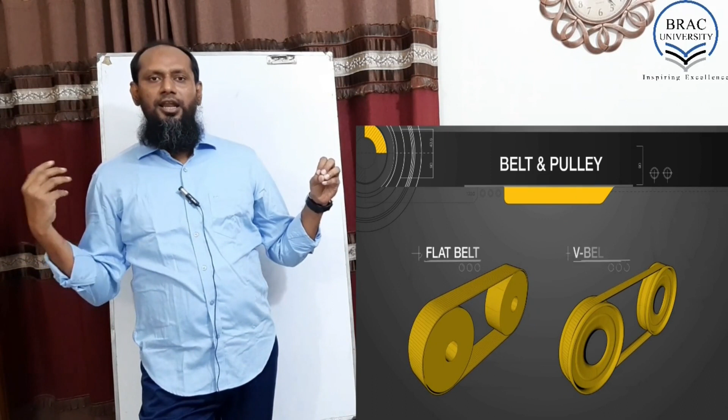This is another important issue, like transmission. Transmission means power will be in one place, but action will be in some different place. Like when we ride our bicycle, we pedal in the middle, but the wheel is spinning at the back. So we are using a chain for transmitting the power to the back. Okay? So chain, timing belt, these are the things that can be used for transmitting the power. Okay?

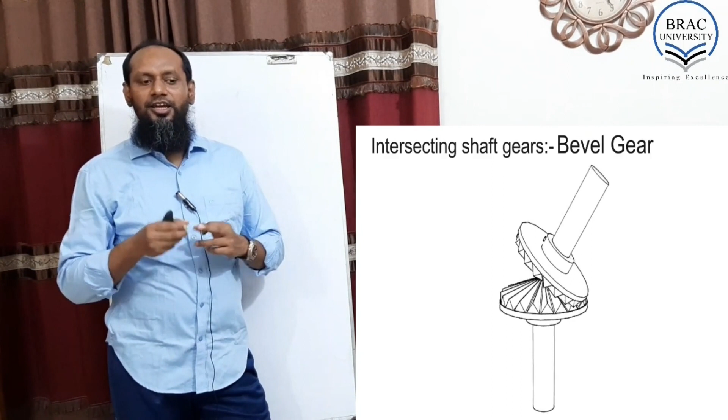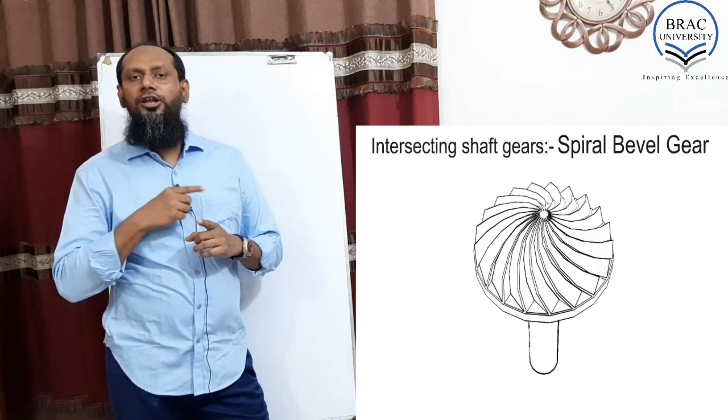This is another thing for transmission: the gear system. Gear is very, very important for robotics guys. Whoever works with robotics needs to understand gears. Number 1, gear can reduce the speed. Number 2, gear can change the direction, like from this direction to that direction. Number 3, it can increase the speed. Number 4, it can even change the form, like rotational form to linear form or linear form to rotational form. So gear is very, very important for robotics.

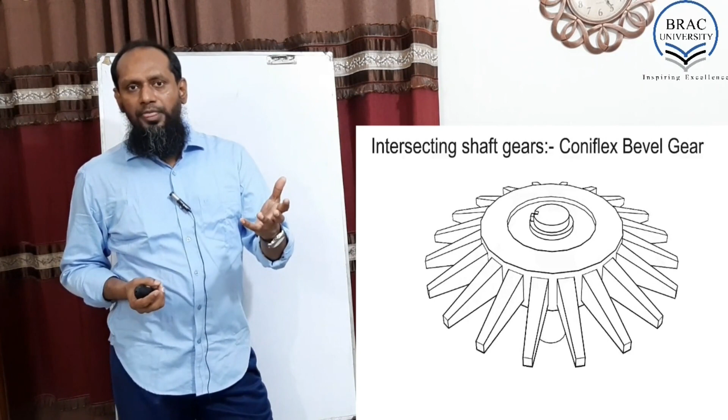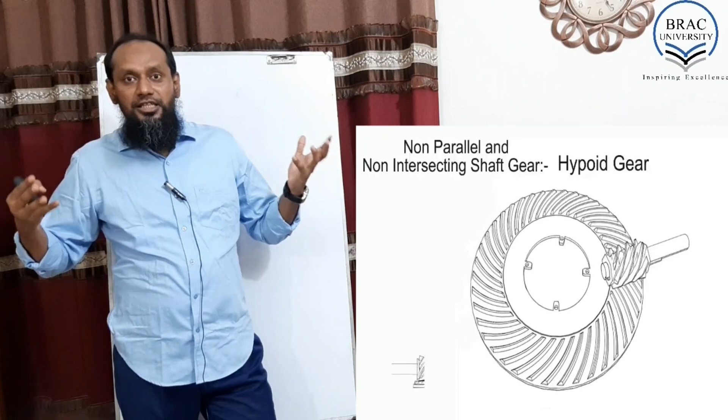Okay. For your information, when we use gears, the speed and the power are inversely proportional. Like if we use a spur gear, if it reduces the speed, then it will increase the power. Even the worm gear, in our car window or the wiper motor, they really use worm gears. It decreases the speed 1:80. That means it decreases the speed 80 times, but surprisingly it increases the power 80 times, minus a few mechanical losses. Even the mechanical loss can be reduced by using lubricant. So gear is another very, very important issue of robotics.

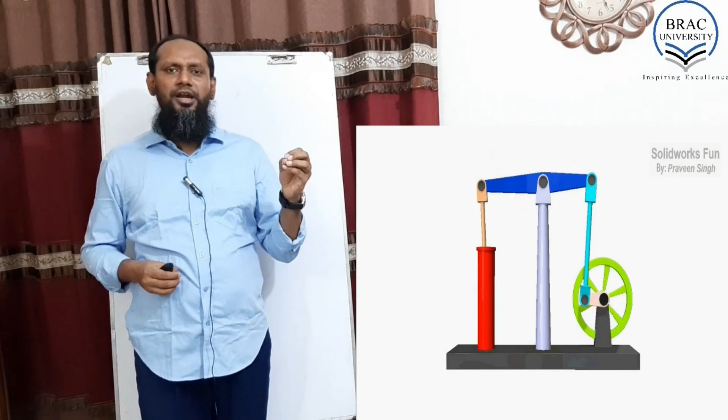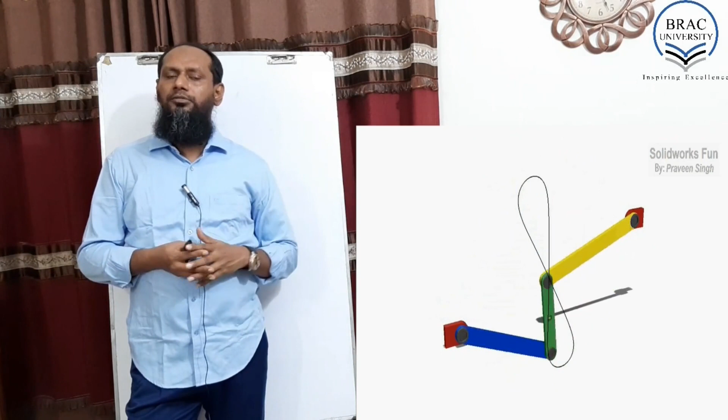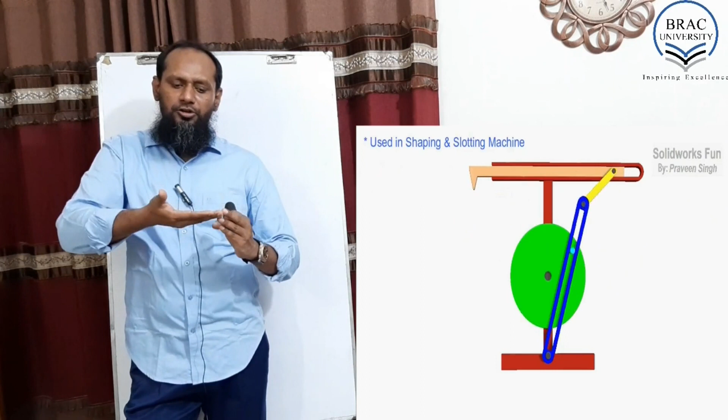This is a link mechanism. Link mechanism means by using one power, it's linking with a number of things. So by using one movement, it's doing 2-3 jobs. Keep in your mind how we can do it. Like in our first significant robot, Chandrabot, we were putting up the basket, and when it was putting up, it was also going forward. So by using just one motor action, one power, it's going up and it's also going forward. That kind of thing is called a link mechanism.

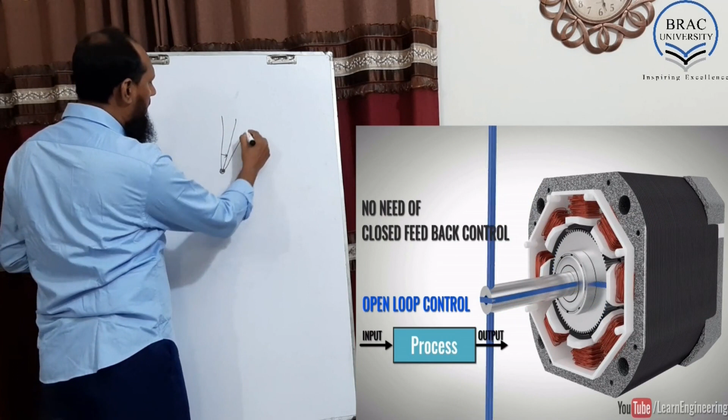Now we would like to discuss a few basic motors. In robotics, embedded systems, digital systems or hardware systems, we mainly use 3 kinds of motors: DC motor, servo motor, and stepper motor. Let us discuss the stepper motor. Stepper motor means step-by-step motor. If you give power, it will take one step. Power up again, second step. Again, power up, third step.

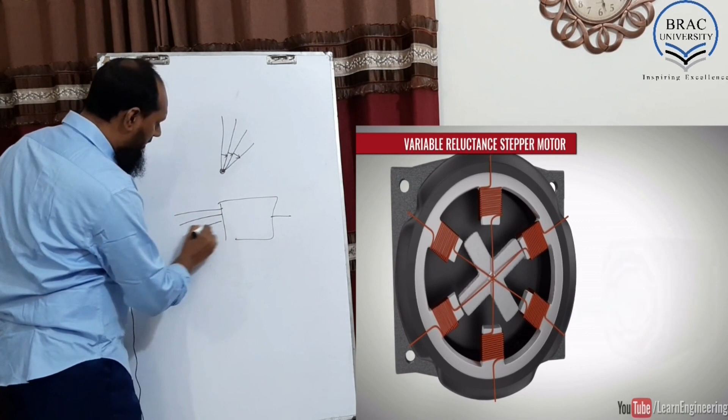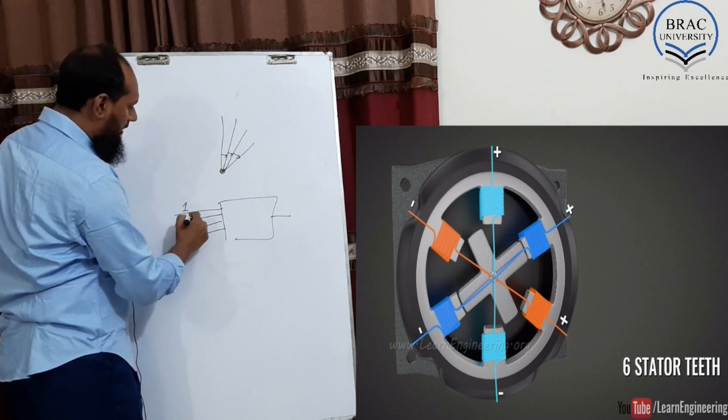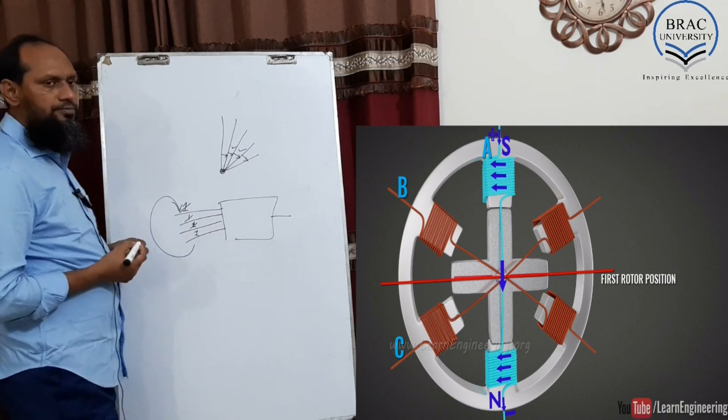So actually, the motor has 4 connections. When you give power on this connection, it will take this movement. If you give this connection here, it will take this movement. If you give connection here, it will take this movement. If you give connection here, it will take this movement. And then again come here. This is called a stepper motor.

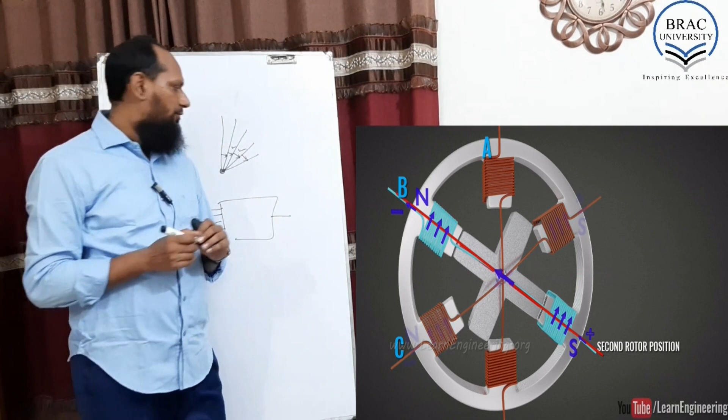The advantage is the rotation you want, the degree you want, can be pre-programmed. If you want a 90-degree rotation, you can see here, we need 5 steps. For 180-degree rotation, we need 10 steps. 360, 20 steps. If you want 5 rotations, 100 steps. So it can be pre-programmed. Some days back, most printers, even floppy disk drives and some CD-ROMs, were built using this kind of stepper motor.

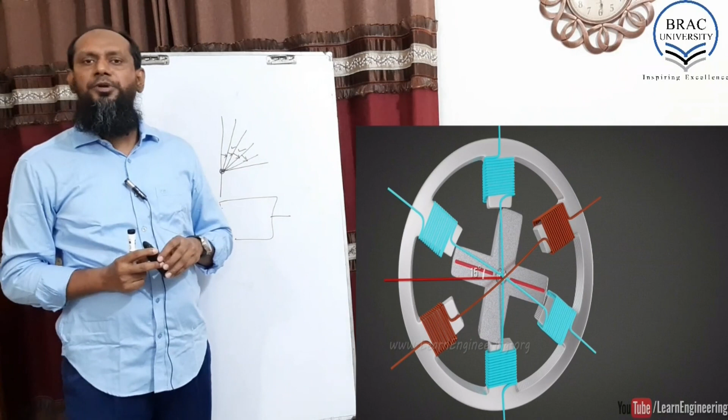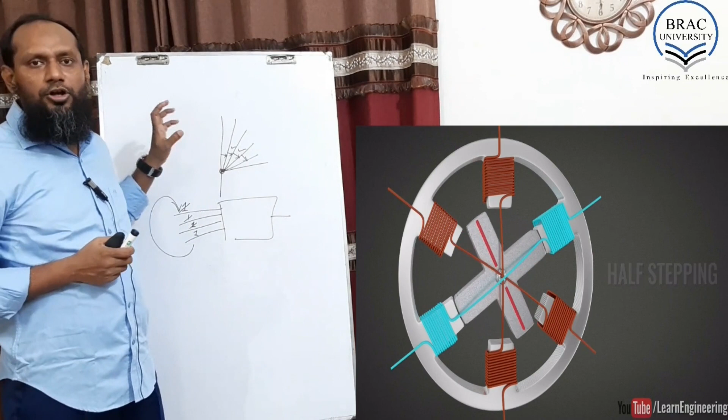But the problem is the stepper motor becomes heavy, because we have to use 4 coils for usually 4 steps. So 4 coils means the structure becomes complex, expensive, heavy weight, and difficult to program. These are the problems with the stepper motor, mainly expensive and heavy weight.

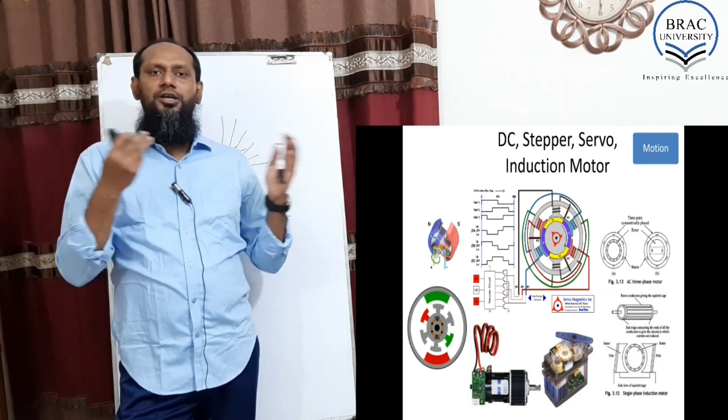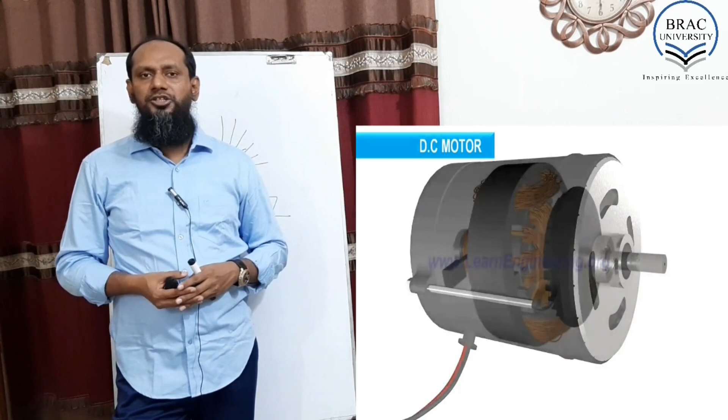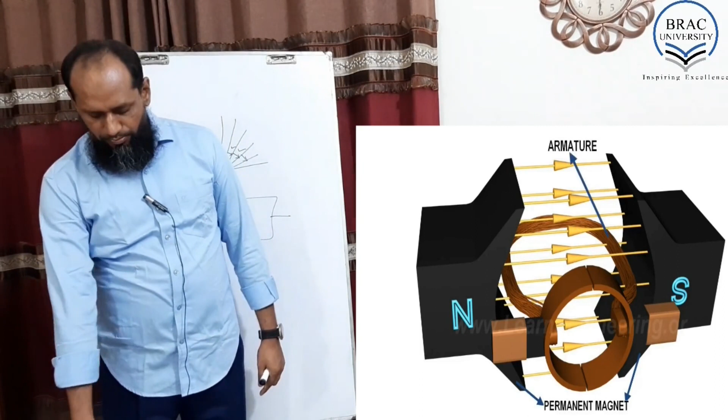So now in robotics we move from stepper motor to DC motor. DC motor is very simple, very cheap. For 50 taka you can get a DC motor in the Bangladeshi market. And the technology is very simple. There are 2 fixed magnets, North Pole and South Pole, and you have a coil. And there are 2 brushes at the foot. When this leg is on the positive brush and this leg is on the negative brush, the coil is built in such a way that the right side becomes North Pole and the left side becomes South Pole.

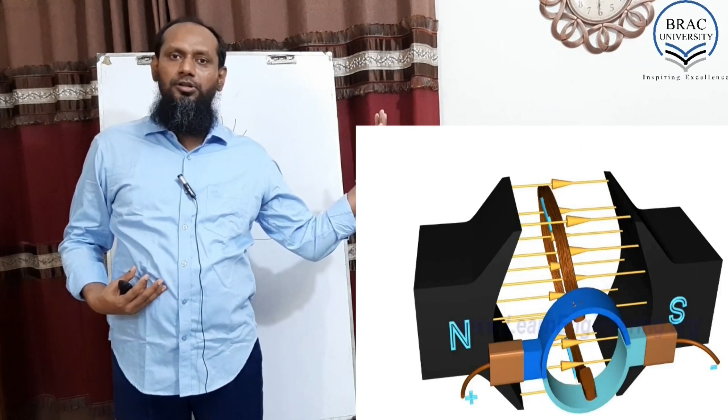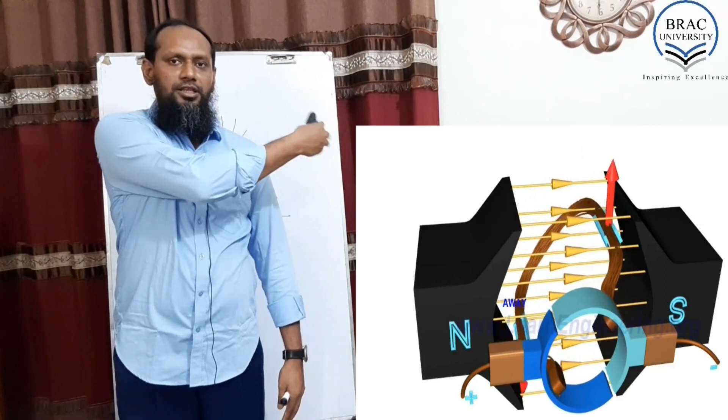But as I told you, the fixed magnet on the right side is North Pole and the fixed magnet on the left side is South Pole. So that one is North Pole and my body also becomes North. And in the same way, on this side there is a fixed magnet with South Pole and my body is also South. What is going to happen? They are going to push me.

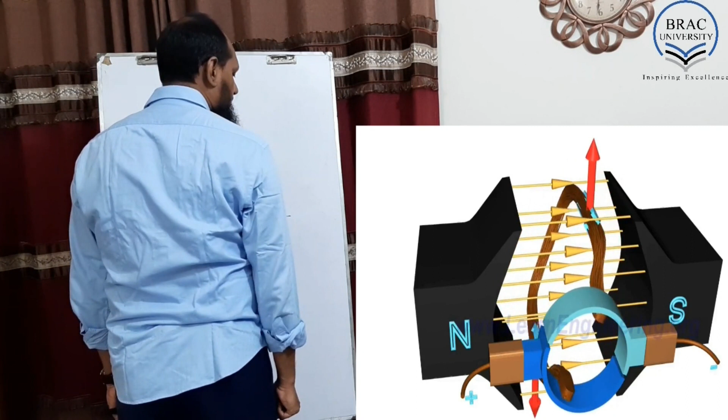Okay, so I will spin and you see my legs will change the brushes. So now my right leg is on the left minus brush and left leg is on the plus brush. So when my configuration is like this, then again this body will become North and this body will become South. Again I'll take a spin. That is the way, a very simple technique. So that's why this becomes so cheap, easy to control, easy to drive. That's why DC motors became very cheap and very popular.

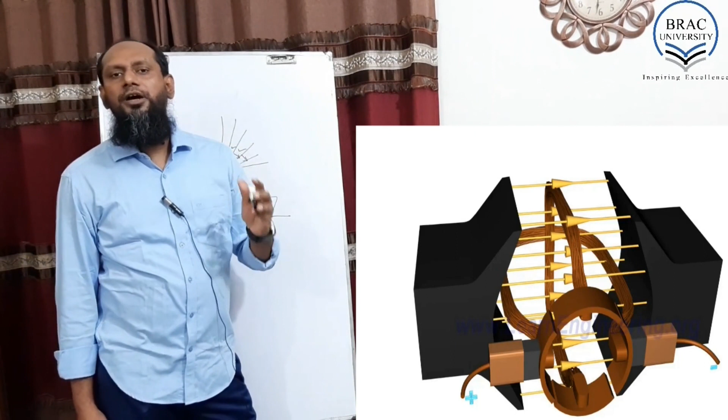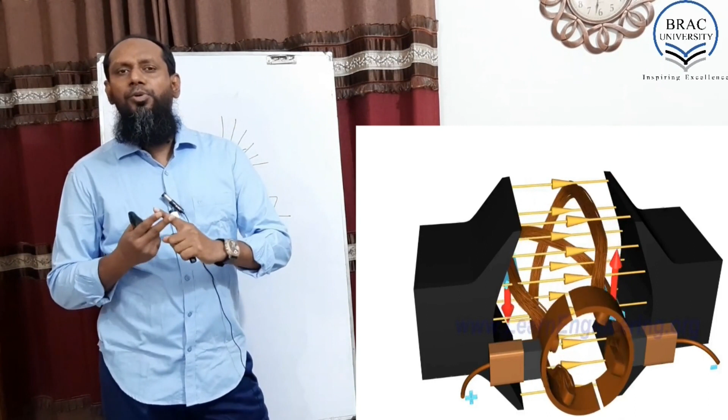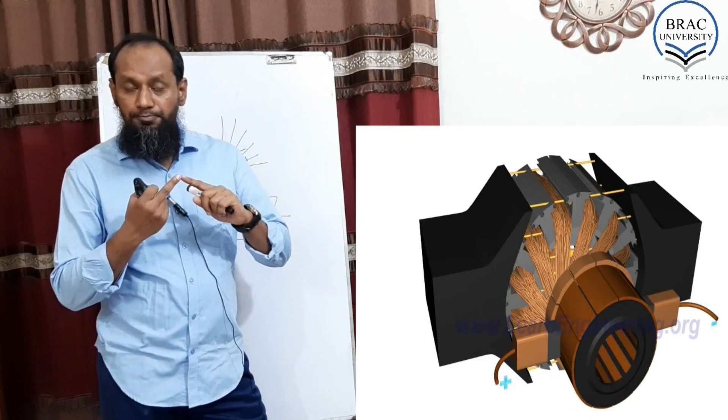In robotics we use DC motors for a number of purposes, but there are very important issues involved in DC motors. Number 1 is speed. The speed is too high, it cannot be controlled very easily. Sometimes we need to reduce the speed, sometimes we need to enhance the speed, like for a quadcopter we need to enhance the speed. And the second thing is the controlling. Like we want to take 3 spins. In a DC motor you cannot do it. With the load, maybe with the same power, it will take 5 spins, but without load it will take 7 spins. So to overcome this, we are using a gearbox, and the third thing is the power.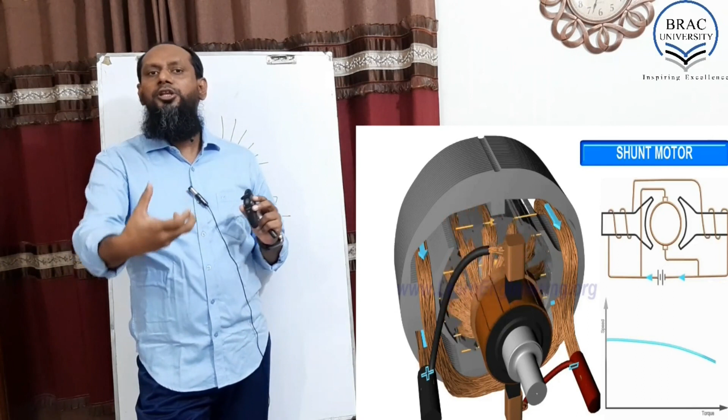Usually the DC motor is a very, very low power motor. You can stop it by using your fingers. So number 1 is speed, number 2 is power, and number 3 is controllability. These 3 things can be handled. Number 1 by using a gearbox. If we use a gearbox to reduce the speed, the power is enhanced, or if we use the opposite gearbox, the speed will be enhanced but the power will become low. So one is gearbox and another one is feedback.

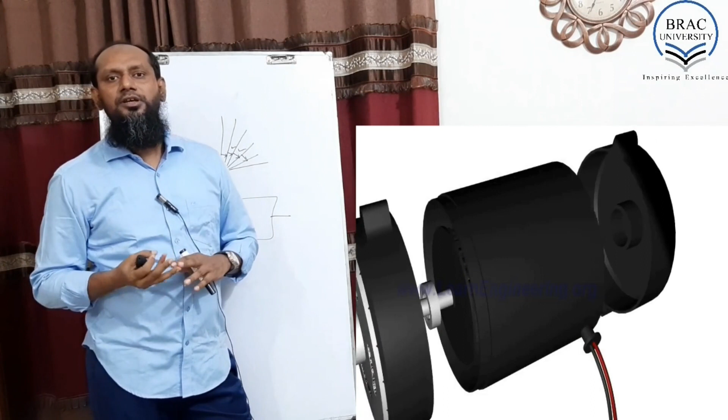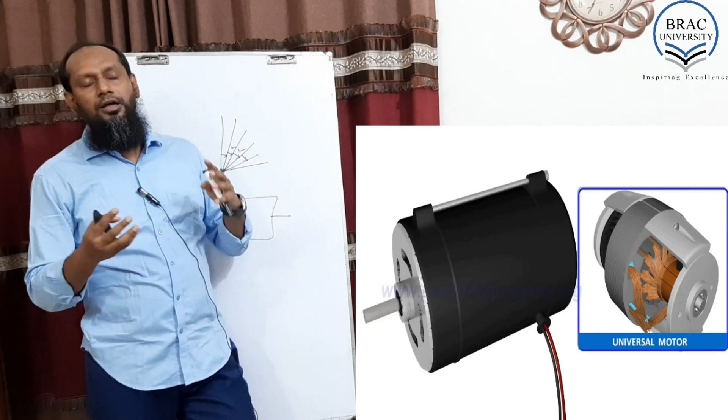We can use some feedback system with the motor shaft so that we can read how many spins it has taken. So if we can sense the rotation or every movement from each point, the DC motor can be used as a stepper motor. So yes, we are using a feedback system with a DC motor for getting input from the motor, how many rotations it has taken or how many degrees it has rotated. So number one is gearbox, number two is feedback system. By using these two things, a stepper motor can be replaced.

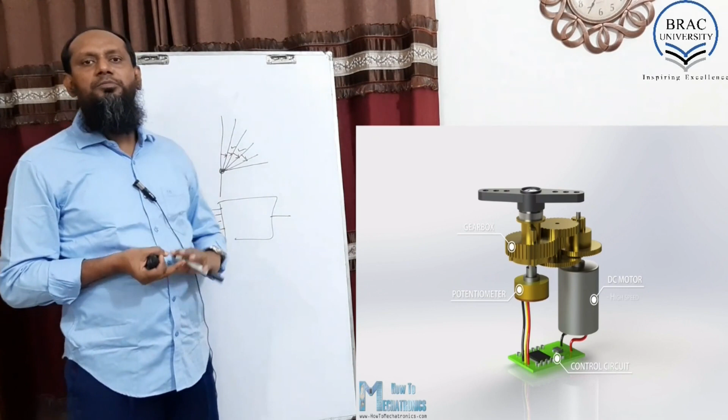In a servo motor, these two things are actually embedded. If you look inside the servo motor, you will see there is a gearbox, and if you dismantle it, you will see there is a potentiometer. It's taking the feedback, like how many spins it has taken. By taking that input, it has a control system inside the motor. It's giving you the degree. I didn't explain about the servo motor. A servo motor is a closed loop motor.

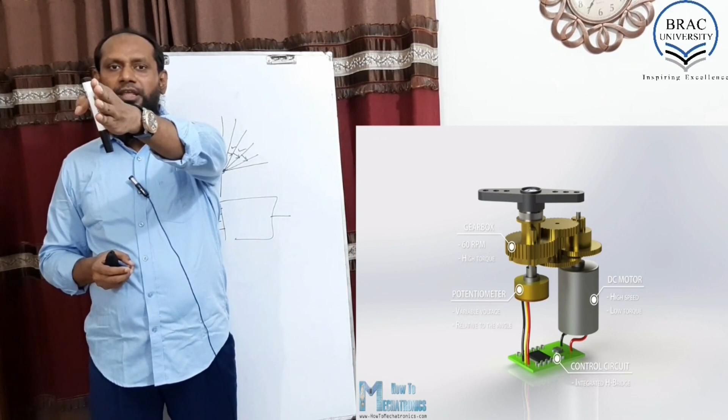If you say a 90-degree servo motor, that means it will take 90 degrees this way and minus 90 degrees, plus 90 degrees, 0, 90, 0, closed loop. It can go from this position to this position. If we say a 180-degree servo motor, it can take 180 degrees. If we say 360-degree, it doesn't mean it is spinning. No. It's coming here and going back, coming here, going back. So that is called a servo motor. Very, very popular in robotics.

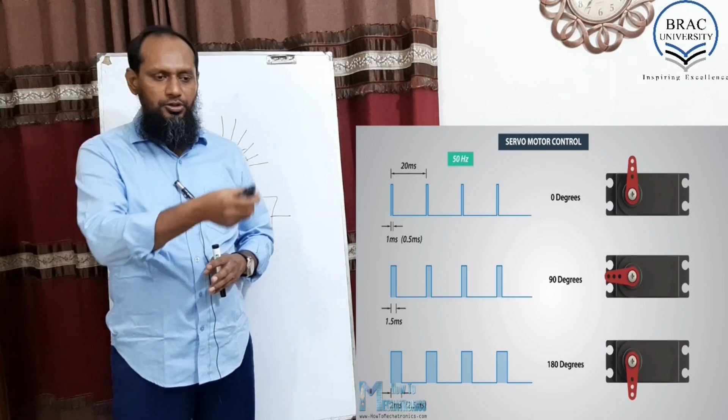So the servo motor is very, very useful. Students are using servo motors for making their demo projects, demo systems. These are very cheap, from 200 taka to 2000 taka. So this is very, very popular. So I discussed three kinds of motor: DC motor, stepper motor, and servo motor.